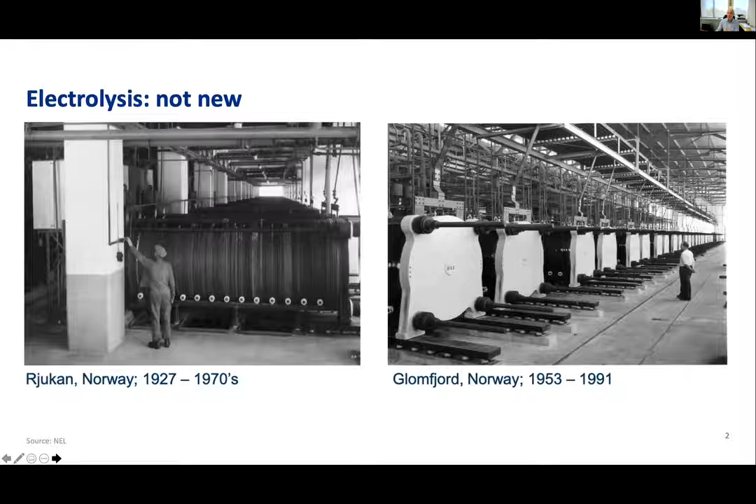And we've made tremendous progress in greening that up. So half of electricity in Germany last year was already green, and several countries in Europe are even beyond that. So overall, on average, half of European electricity is green.

But then if we look at the bulk of final energy, those are molecules—coal for power generation, natural gas for heating and industry, and of course diesel and petrol for transport. There we still have a lot of work to do, because we only have 9% renewable molecules in the system. So yes, there is a lot of progress in the electricity field, and we see the impact of solar and wind, but the bulk of it is still molecules, and they're still not clean enough. So what do we need to do?

Of course, we need to keep building new renewable electricity if we want a decarbonized energy system. But we also need to increase the share of electricity in the overall mix, because on the electricity side it's actually easy—right now solar and wind is cheaper than fossil fuel. So expanding that doesn't cost money, it actually saves money. So we also have to expand the use of electricity in the mix. Electrification is a big element of the energy transition.

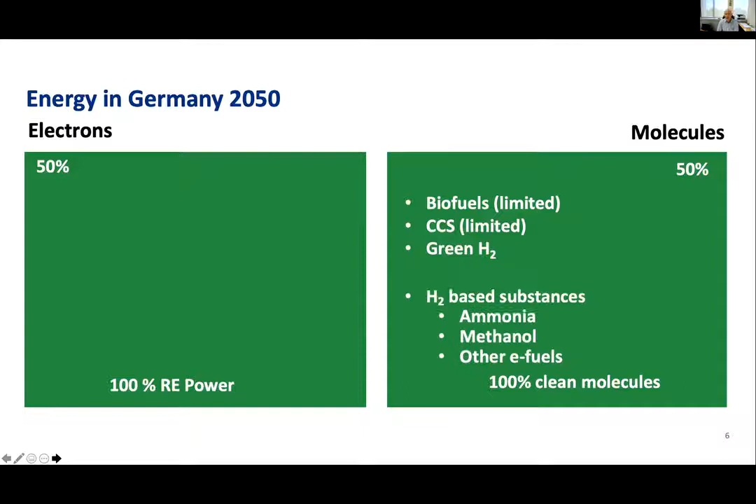With hydrogen we can also make ammonia, as already mentioned. We can make methanol, other fuels, e-fuels, jet fuels, etc. Of these options, I think hydrogen, especially green hydrogen, has the better cards because you can do it small or big, decentralized or centralized. You can ship these fuels cost effectively over big distances, and you can actually store them loss-free over seasons. So of the options on the molecule side, I think hydrogen will have the biggest share.

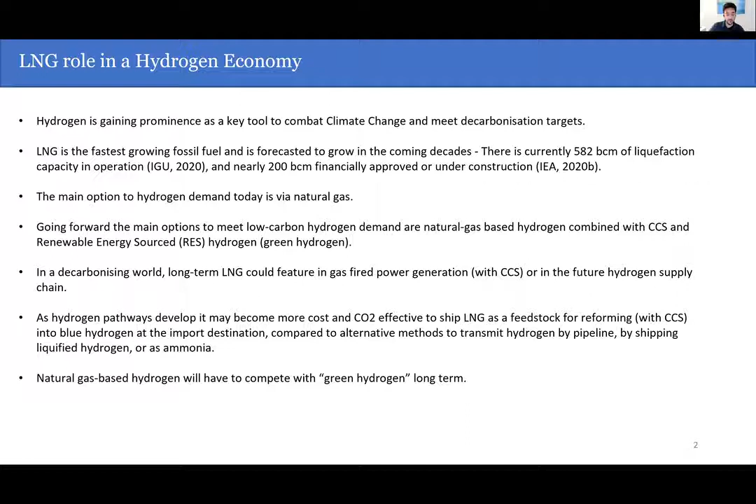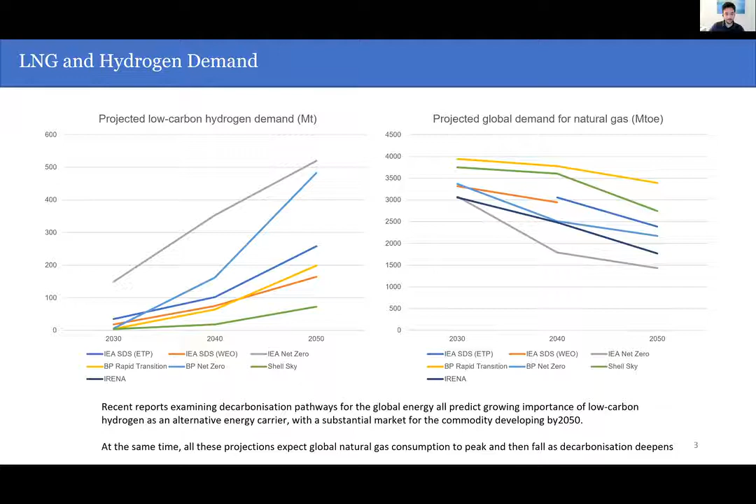So to summarize where LNG can play a role: there are roughly three different ways natural gas can contribute. One is to deliver LNG as is, and then at the receiving terminal capture carbon, apply carbon capture, and inject hydrogen into the grid. The other option is, on the upstream side, to convert the gas to hydrogen to ammonia, which allows it to be shipped more easily, then reconvert the ammonia back to hydrogen, or use ammonia directly in, for example, coal-fired power stations, as we've seen in Japan recently.

The third option is to completely convert the upstream gas into liquid hydrogen and ship that liquid hydrogen, which requires some economic and technical advancements. But roughly, there are three ways gas can play a role. There's also pyrolysis, which is another technology - instead of methane reforming, you would use pyrolysis, for example.

So why were we looking at those two, besides the overall demand and importance? Well, there are actually some links between them that should be investigated a bit more. From a feedstock natural gas perspective, as the fastest growing segment within natural gas, LNG will play a role.

If there is a place for quote unquote blue hydrogen, LNG will obviously play the key role to deliver that. There are less and less pipeline gas projects, and there's less indigenous supply, especially in Europe. Therefore, if there is a role for blue hydrogen, LNG will meet that. The LNG industry is forecasted to have a positive future in the next 10-15 years, so how does that fit in with hydrogen?

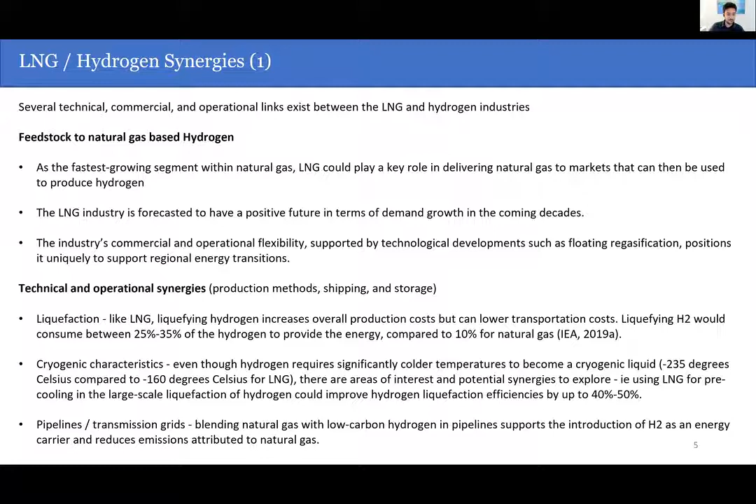But also in terms of downstream, utilizing natural gas and introducing low carbon hydrogen to those grids is a possibility, and in some places it's already being done. It could be up to 10-20% of the current gas grid that can take in low carbon hydrogen, which allows for synergies there. In terms of commercial synergies, probably even more.

In terms of the shipping side, although there were some initial views on reconverting LNG ships to hydrogen ships, it seems to be unlikely. However, of course, using LNG as a feedstock will help the LNG shipping industry a bit more.

But from a value chain component, the way LNG was developed 30, 40 years ago and is still being developed, there are lots of similarities for hydrogen potentially. You need long-term buyers. The same importers previously could probably be the same importers for hydrogen. You need a very complex chain with project financing from the upstream all the way to the downstream, assuming there is a level of exports and imports being developed.

You will need some potential government-to-government agreements, which we've already seen, some bilateral agreements, some infrastructure development and transport. All that has been something where the hydrogen industry can learn from the LNG industry. And of course, long-term contracts, these large projects will need to be underpinned initially as technology improves and as a shorter-term market develops.

So there are a lot of potential vertically integrated approaches that can be applied from one industry to another. And really a lot of the same players, whether it's energy companies or technology providers, are companies looking to transfer some of that large project management experience or large capital intensive technologies from one to the other.

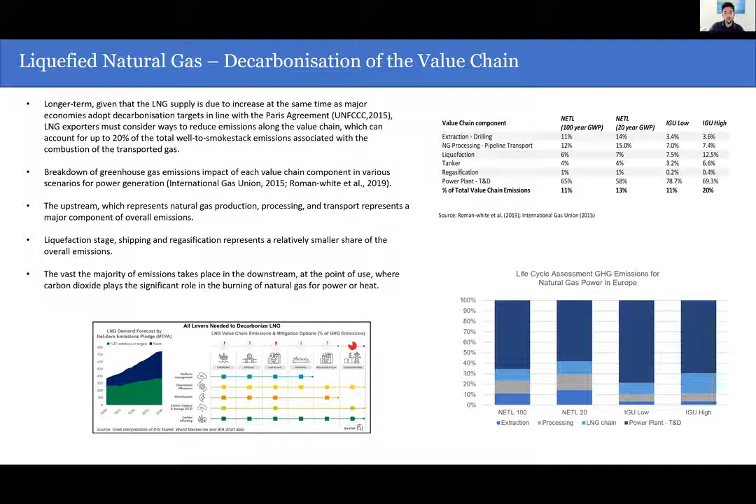But at the end of the day, over 70 to 75%, depending on the carbon intensity of the source, of the emissions is downstream, meaning, for example, the power plant. To address that, long-term importers and exporters will have to look at different measures, and hydrogen provides that opportunity. Blue hydrogen specifically, or natural gas-based hydrogen, provides the opportunity to decarbonize the entire chain if the conditions make sense. If you look at all the decarbonization options LNG producers have, these are all things being looked at, already announced, or being implemented.

It obviously depends on project to project in terms of the geographical components or the resources available. But these are all things that are being done.

However, if you look at more strategic or hydrogen related options, these are the ones where LNG exporters long term and LNG importers will start to think about decarbonizing and lowering emissions as much as possible. If we want to truly decarbonize, we may want to look at options on the importing end, such as applying methane reforming or pyrolysis, then blending the hydrogen into the grid or straight to industrial users and clusters, which we've seen as a potential first wave of opportunities. That could be a great opportunity for the LNG industry to deliver high value, low carbon hydrogen first, and then be part of that transition.

More strategically, long term, if you're a resource holder with access to large scale renewables, you could think about producing hydrogen upstream. We mentioned blue here, but there's no reason it can't also be green, or both, depending on the characteristics. This is where hydrogen really factors in. As a previous speaker mentioned, blue hydrogen might be cheaper now, but eventually it will be green only. What does that mean? Is there a role there? And what do you do in the meantime?

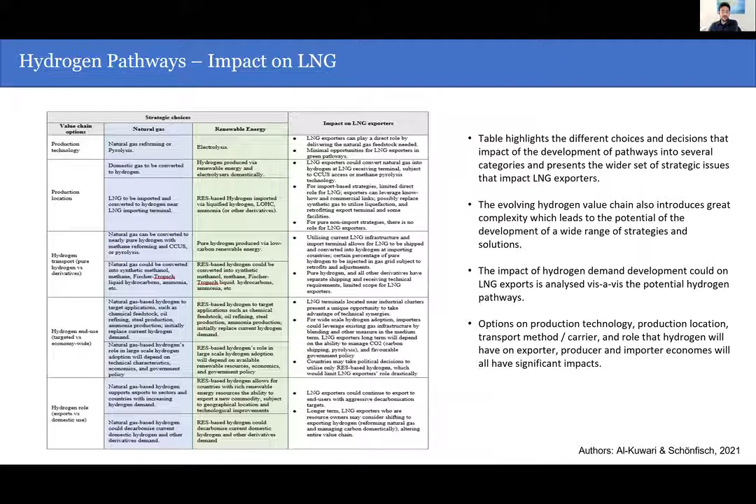Something interesting to note is that gray hydrogen, the non-blue, high CO2 emitting hydrogen, is now almost very close to blue hydrogen in cost. If you look at today's CO2 prices in Europe, that gap is closing very quickly. But that gap can also close with green hydrogen even quicker as we go forward. If that were to develop and it became green only, your options as an energy exporter are really minimal. You may be able to retrofit some facilities, but your upstream gas will have less value. So the implications are significant for different pathways. This is illustrative, but significant.

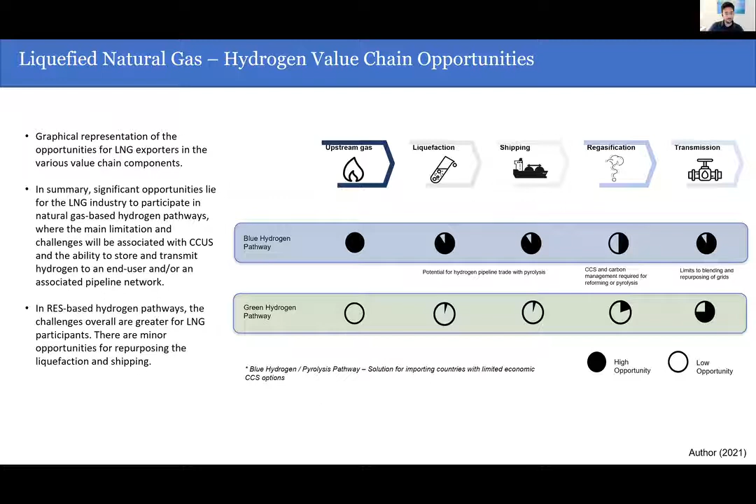Technology will be a big thing, economies of scale on the production side, but also policy choices, CO2 prices, and potentially more dogmatic choices, where some regions will say, no, we want green only, no matter what. All those things will impact the short to medium term. Natural gas-based technology, though, taking everything into account and looking at the big picture, is the most economical choice for the short to medium term, with most studies saying until 2030 or 2035, depending on the region. Long term, it could become competitive if renewable energy-based electrolyzer costs come down.

But also you have to factor in the cost of natural gas, which depends on the region. Amongst all the technologies, natural gas-based CCUS can be supplanted by methane pyrolysis, which is interesting because this technology is being looked at more and more. It eliminates the need to manage CO2, giving you solid carbon instead, which is an easier product to manage and store. This could be a game changer for blue hydrogen or natural gas-based hydrogen, but there's a lot of uncertainty there.

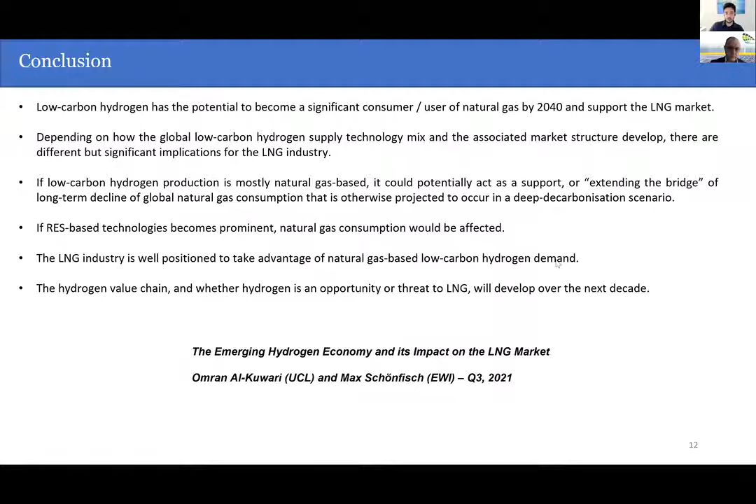Thank you very much, Mr. Omran, for this insightful and concise presentation. Please stay with us for the discussion after Jorge's presentation. I think from the beginning we heard a very inspirational word from His Excellency, the Ambassador, Dr. Christian Tudor, and Dr. Abdul Sattar, Frank Wouters. I think hydrogen is coming as a carrier for the future, but there is still some competition with other resources, as Mr. Omran mentioned. But from the European side, we have to hear from Mr. Jorge also what happened in Europe, and what is the roadmap for Europe to achieve those ambitious targets.

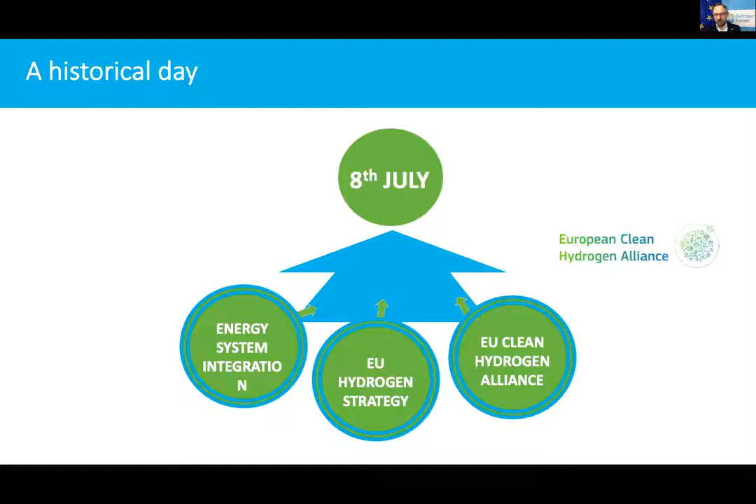But the most important target when it comes to capacity is the 6 gigawatt electrolyzer capacity producing clean hydrogen as of '24, and 2 times 40 gigawatt as of 2030—40 gigawatt in Europe itself, and another 40 in the neighborhood of Europe, where the Gulf and the MENA region, of course, would be part of it.

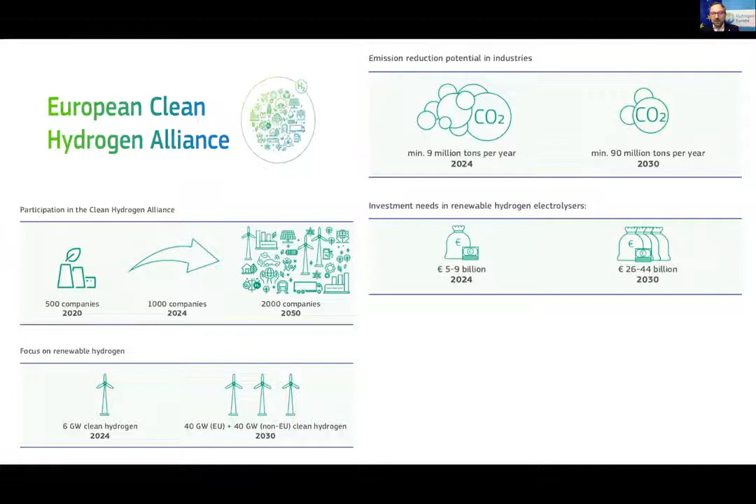On the right-hand side, you see how this translates into CO2 reduction targets: 9 million tons already in '24, and 90 million tons, a tenfold reduction of CO2, in 2030. The investment needs in renewable energy, especially electrolyzers—and here we concentrate on electrolyzers only—would be between 5 to 9 billion in '24, and up to 44 billion in 2030.

This I showed you already, but what is clean hydrogen? This is one of the most important questions. We need to see what the European Commission has defined as clean. They have defined it in a delegated act, which still needs approval by the member states, defining clean hydrogen production as corresponding to not more than 3 tons of CO2—2.2 to 3 tons of CO2 per ton of hydrogen.

There is also a mention of ammonia. For ammonia manufacturing, it now requires compliance with hydrogen as input for it to be in the taxonomy range. This was an interesting success also for Hydrogen Europe, because ammonia plays an important role in transporting hydrogen, or in being used as a fuel in maritime shipping.

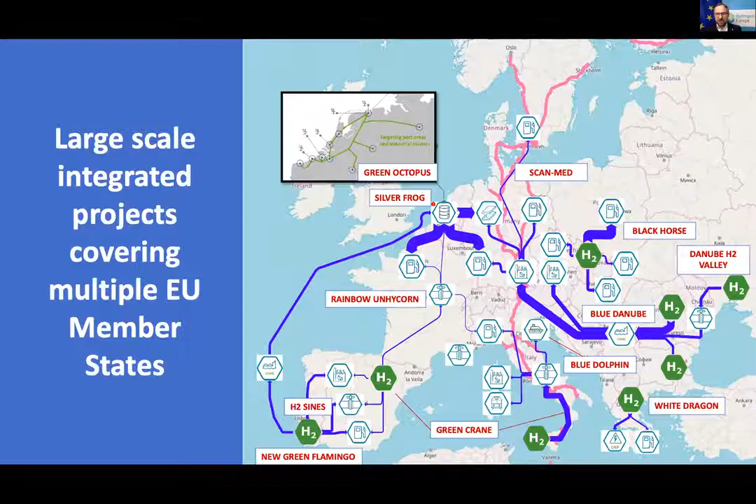These governments are now endowed with a lot of money from the recovery and resilience funds, the after-COVID-19 funds, globally well known, and governments will invest into hydrogen manufacturing, to say the least. These large-scale flagship projects cover the whole hydrogen value chain, achieving an interesting amount of hydrogen volume and decarbonization, across all parts of the value chain.

How do we wish to not make these projects just state-aid-funded, but future market compatible? I'd like to introduce a mechanism we want to promote. On one hand, it's a funding program to efficiently promote the market ramp-up of green hydrogen and hydrogen-based derivatives. It's also based on hydrogen energy partnerships with countries that have a correspondingly large potential for long-term, cost-effective and reliable supply of green hydrogen to the EU. Qatar and Kuwait definitely fall into that category. There should be long-term purchase contracts on the supply side, and contracts for difference on the demand side.

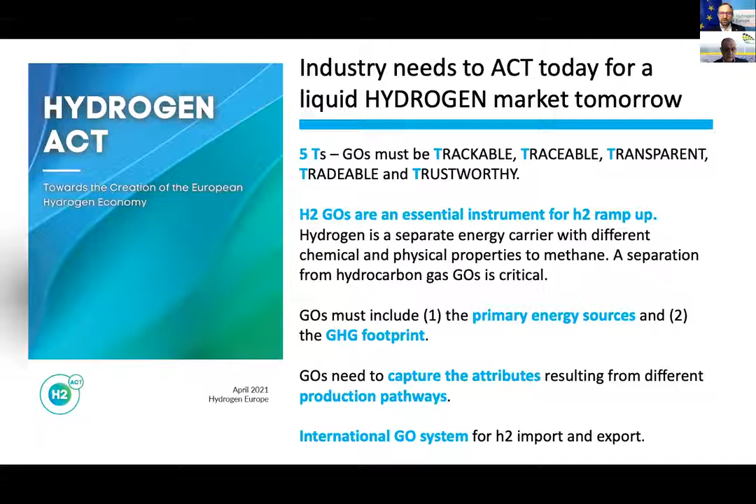The GOs need to capture the attributes resulting from different production pathways. We believe that very soon an international GO system for hydrogen import to Europe, but also for export, will be established. We believe it should follow the 5 T's: it must be trackable, traceable, transparent, tradable, and trustworthy.

With that, I would like to thank you for the invitation. Thanks for your attention, and also excuse myself for not being able to attend the Q&A. But again, Frank Wouters, I think, will make it. Shukran, thanks very much indeed.

Thank you very much, Jorge, for this very clear, concise, and straightforward presentation. I think we heard a lot of good things, and that is one of the elements or pillars of any hydrogen strategy: to have this roadmap for a country or for a region like Europe, and this is very important for an emerging carrier as hydrogen. Thank you very much, Jorge, and hope we can count on you in our future events. Thank you very much.

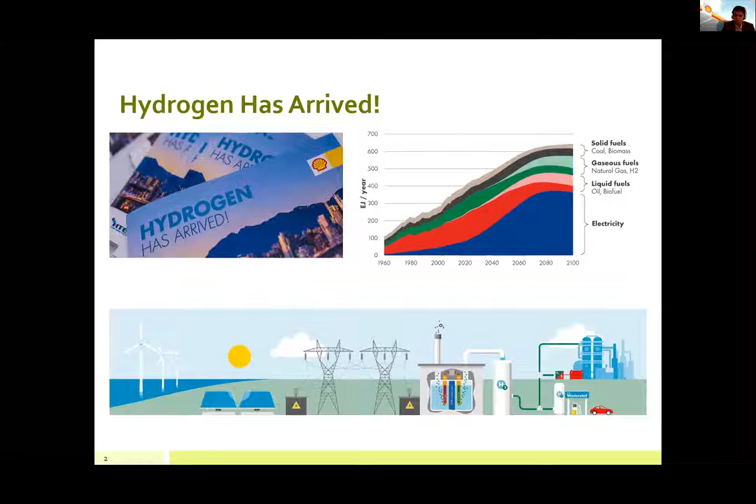What's important to realize as well is, as Frank pointed out, this is going to be a huge effort. The scale of the problem is very large, all the way from hydrogen production, transport, utilization - everything needs to be encompassed into this new infrastructure that is coming up. And innovation will play a very key role. So what we see at Shell is that there are the consumers, the energy providers, the suppliers, and the governments - everybody has to come together to essentially form this new hydrogen economy.

And we've seen Dr. Omran mentioning this as well. I would just like to give an example of Pearl GTL, the largest gas to liquids plant here in Qatar that Shell is operating. The Pearl GTL plant is founded on a very solid foundation of 40 years of research.

But roll back time 40 years, people were still sending emails to each other, requesting for meetings to be set up and discussions to be had. And with all due respect to the pioneers of that research, the latter stages of the research moved a lot faster, enabled by technologies like digitalization technologies that enable such kind of innovation to happen.

Again, realizing that geographically we are not limited to where innovation can happen. We talked about Europe as being the champion in terms of hydrogen production, but hydrogen research and hydrogen innovation will happen all over the world.

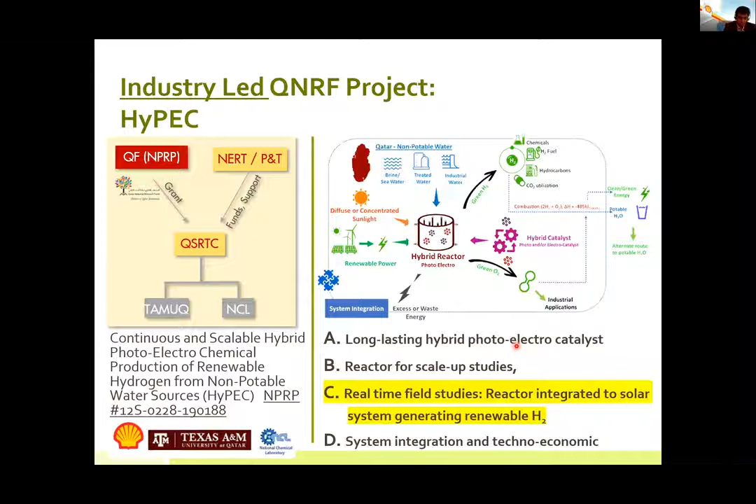For this, we pulled a team together, again distributed in different parts of the world, within Shell and outside in academia as well, where Dr. Dabi Al-Mohanadi is leading the concept development and systems integration. Dr. Santosh Kumar Babu is leading from National Chemical Laboratories an effort in catalyst development. Dr. Konstantinos, whom you would be hearing present in this hour as well, is leading the reactor development, and I will be championing the overall project and also leading the pilot development in Qatar.

We have just completed our first year of project, and what we have sustained thus far is we've mapped out the water resources that can be utilized for this hydrogen HyPEC project, and we have gotten the experimental setup ready, where we have seen the first indication of hydrogen. Also, some background work has been completed to come up with suitable photoelectrochemical hybrid reactor concepts that we will be looking into for the pilot.

2020 has, of course, been quite challenging for research as well. Specifically, our efforts of catalyst development in India have been quite severely challenged by the pandemic. However, we have had good leads that we can generate a catalyst, an organic catalyst that we can utilize in this project.

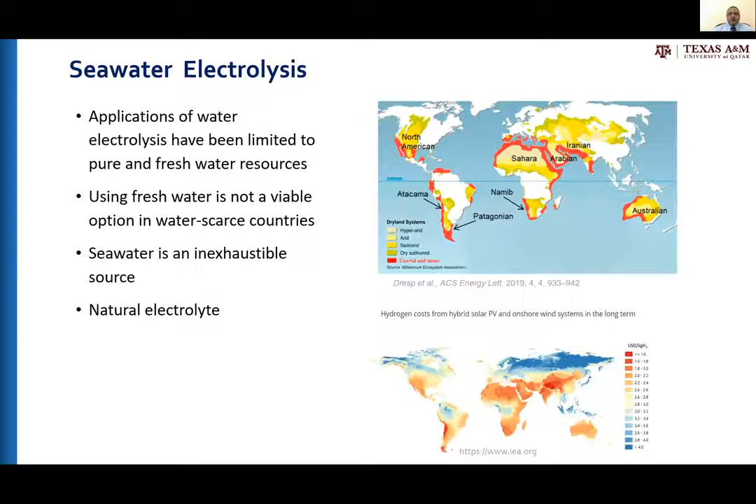However, there are some challenges with using seawater for water electrolysis. The first and most important one is the chlorine evolution reaction. We know that seawater has chloride in it, and when chloride is oxidized to produce chlorine, this competes with water oxidation to produce oxygen, because chloride oxidation involves only 2 electron transfer steps, but oxygen production involves 4 electron proton transfer steps. This makes chlorine kinetically more favorable than oxygen, but thermodynamically less favorable than oxygen.

So how do we address this problem? Basically, either operate below the thermodynamic limit for chlorine production, which is around 1.72 volts—this would require very highly efficient electrocatalysis—or produce catalysts that are more selective to oxygen rather than chlorine. Another alternative, also part of our project, is to do coating for the catalyst to prevent chloride from reaching the catalyst and make it selective to water.

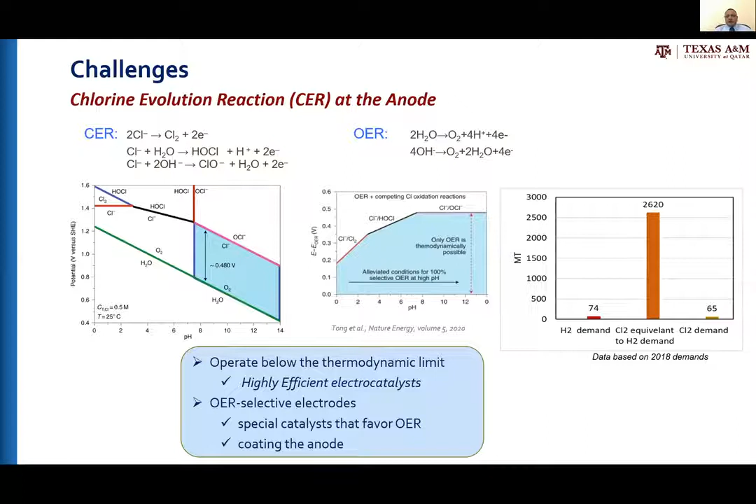Another challenge with using seawater is the formation of precipitates from calcium and magnesium. We know that seawater also has calcium and magnesium, especially problematic in alkaline conditions. This is actually how the conventional electrolysis process is usually done, in alkaline condition—that's the most common and cost-effective technology done now.

And the problem with that, when you use seawater, you precipitate magnesium hydroxide and calcium hydroxide. The possible solution for that is either remove them from the water before use, but this requires the addition of chemical reagents, solid waste production, and also pH adjustment sometimes.

The other alternative, which is desirable regardless if you work with seawater or fresh water, because fresh water also has some challenges related to working in alkaline and acidic conditions that we will talk about briefly later on.

So another desirable option is to work at neutral or near neutral pH. Why is that? Because then we will avoid salt precipitation. It will enable the use of low-cost, earth-abundant electrocatalysts that are usually unstable in acidic or alkaline environments. It will also enable the use of inexpensive equipment that would normally corrode and deteriorate in basic or acidic environments. Additionally, it will avoid the use of high concentration acid or base electrolytes.

You need a small amount of buffer since the water is already a natural electrolyte, and also it will minimize the environmental and safety issues associated with severe alkaline and severe acidic conditions.

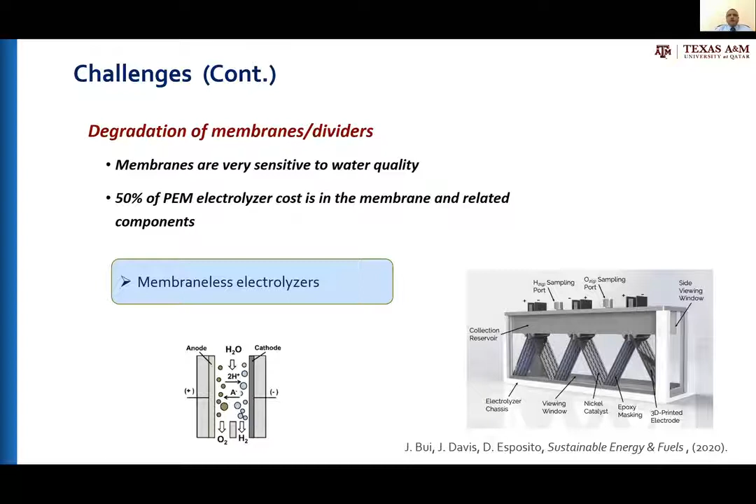One solution for that, which is also part of our project, is to use membraneless electrolyzers, electrolyzers that do not have membranes. This is one design we are planning to use, which we call the flow-through mesh electrode system. When you have a mesh here, this is not a membrane, it's just a mesh, and you have the catalyst at the outer surface of the mesh. The water flows in this direction, and as it goes out, it gets reduced on one side and oxidized on the other, to generate oxygen and hydrogen.

This shows a demonstration of the project team's work. Dr. Daniel's work is specific to membraneless electrolyzers. As you can see here, there is no mixing, and this is a major issue you would worry about with a membraneless electrolyzer—the mixing between oxygen and hydrogen. You can see the mixing is minimized, and the hydrogen comes out separated from the oxygen here.

First, to design and fabricate pH neutral electrocatalysts, and then to coat these catalysts in order to suppress the chlorine evolution reaction. Then we take the optimized ones and evaluate their performance in a three-electrode cell, and the most promising one we convert into a membraneless electrolyzer. At the end, we conduct techno-economic and life cycle analysis of the proposed technology.

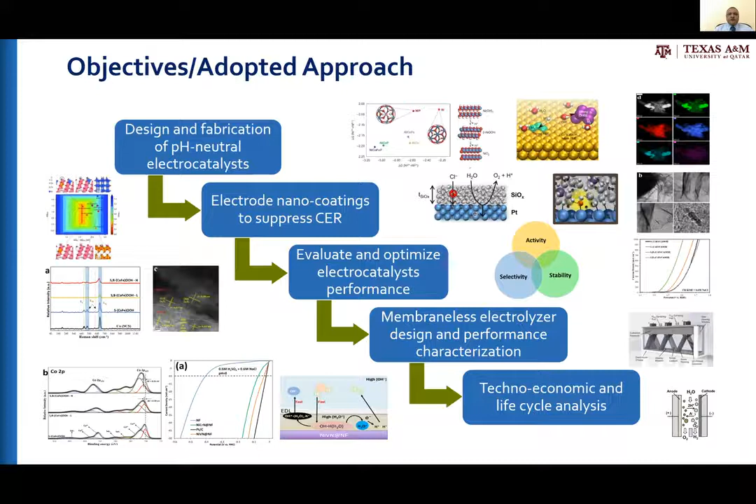So talking about the catalyst and working at near neutral or neutral pH, this is also challenging from the electrocatalyst point of view. If you talk about the oxygen evolution reaction, you would need alkaline conditions because you have hydroxide as the main reactant. When you talk about the hydrogen evolution reaction, you would need hydrogen ion as a reactant because that makes the process kinetically much easier.

However, in neutral conditions, you have water as the reactant, and this incorporates additional water dissociation steps, as we can see here. So we have to dissociate the water first, before we can do anything else. This makes the process sluggish and kinetically limited, and it's actually more limited for the oxygen evolution reaction, for the reasons I talked about regarding electron transfer, in addition to the water dissociation step.

People have been working on this—there have been numerous electrocatalysts developed in the past and still being developed, but the majority focused on either acidic or alkaline conditions, and the most efficient ones are still based on noble metals or noble metal oxides. There has been some effort to produce inexpensive, earth-abundant metal and metal oxide based electrocatalysts, but not much has been done on neutral pH water electrolysis.

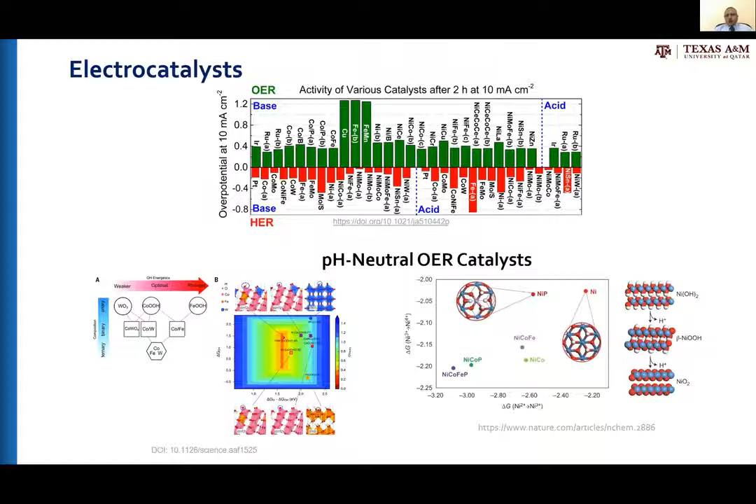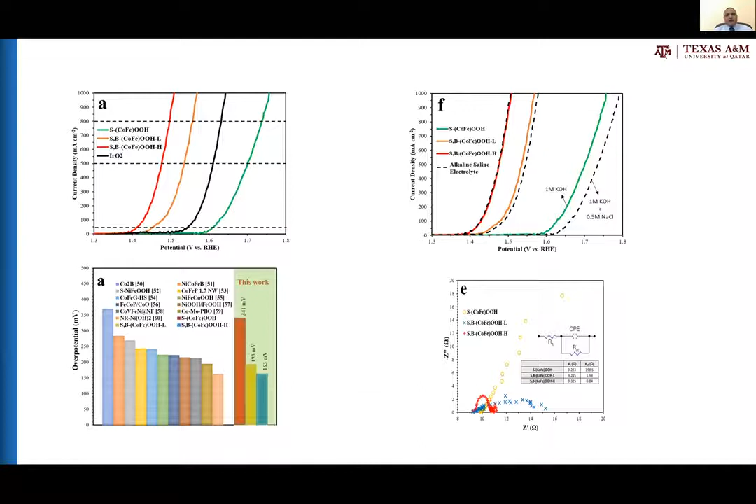We did the work at neutral pH as well, and performed stability tests. The catalyst was very stable, and we found that the sulfur-boron doped one is highly efficient compared to the sulfur-only doped one in neutral conditions.

Also for the HER, or hydrogen evolution reaction catalyst, we used the hypothesis that combining a strong hydrogen-binding metal with a strong hydroxide-binding metal oxide would enable the water dissociation process, in order to facilitate the hydrogen evolution reaction.

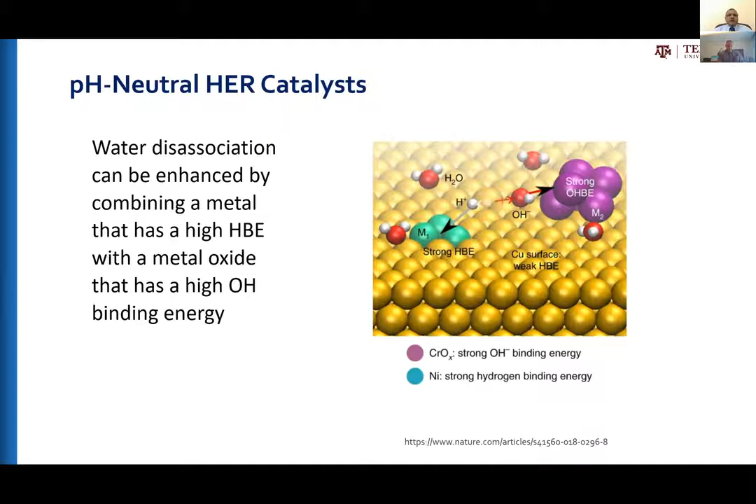Finally, this is about the coating of the catalyst. This shows the results of a silicon oxide coating on the surface of the catalyst, an ultra-thin layer designed to prevent chloride from reaching the catalyst while only allowing water to reach it.

You can see the results here comparing the one that has the coating and the one that does not. We can see very good performance when we have the coating with the silicon oxide.

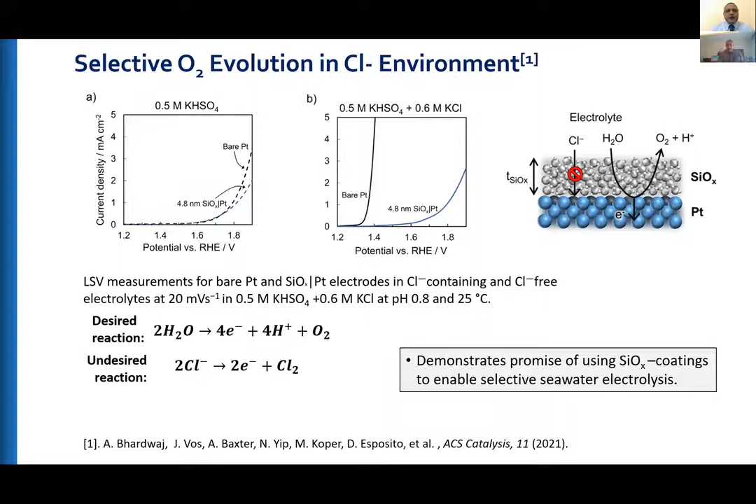In summary, operation at neutral conditions is desired regardless of the source water. Also, membraneless electrolyzers could decrease materials and manufacturing costs, and are more durable in harsh operating environments. The sulfur-boron doped multi-metal oxyhydroxides and also the oxynitrides provided good efficiency and stability for oxygen evolution and hydrogen evolution reactions respectively. Encapsulation with an ultra-thin permeable overlayer prevented chloride from reaching the catalyst, making it selective to oxygen evolution.

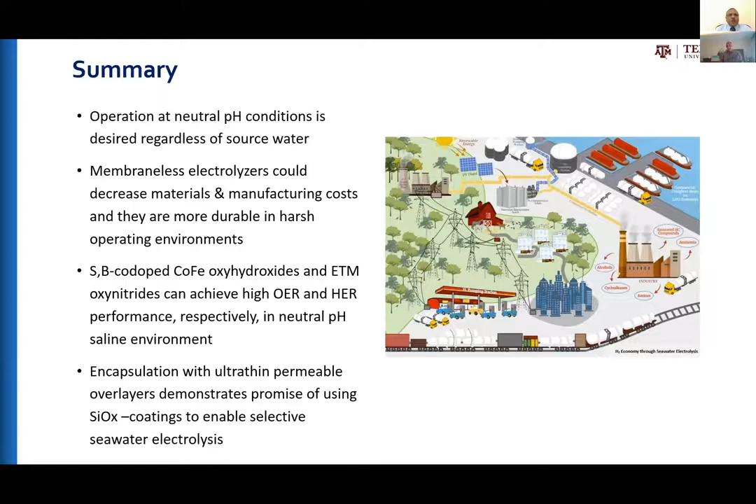In terms of output and impact, thanks to the generous support from Qatar National Research Fund, during the first year we have published 5 papers. We have 4 articles under review by journals, we are working on 3 additional articles, and 1 disclosure application that we plan to file soon.

We have 3 graduate students and 7 undergraduate students involved in the project, and 7 postdoctoral research associates across 3 different academic institutes. Also, the most important thing is the synergy and collaboration between academia and industry, as Dr. Dhruv mentioned a few minutes ago.

And finally, I would like to acknowledge the team members from Texas A&M University at Qatar, from University of Toronto, from Columbia University, from Shell, and also acknowledge the generous support from Qatar National Research Fund and also the co-funding from Shell.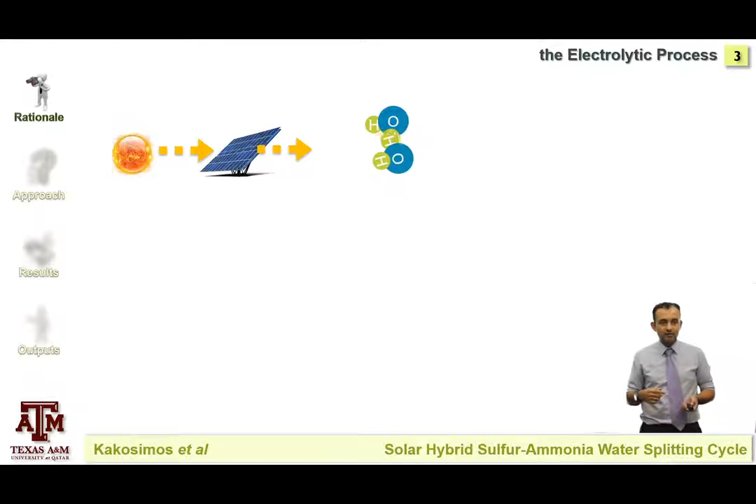As you heard already from Dr. Abdulwahab, the electrolytic process is a straightforward process when we want to use renewable energy resources to produce hydrogen. We utilize sunlight, we convert it to electrons, and then we split water. Now, for the photocatalytic process, we need to do one extra step. We require a catalyst that in this case utilizes the sunlight, photons to make the electrons, and then split water.

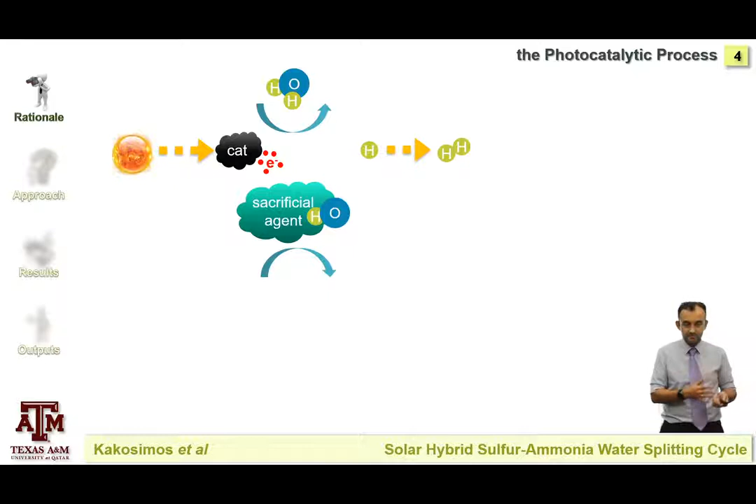Of course, the process is more complicated than this animation, but in any case, to drive it forward and release hydrogen, we require a sacrificial agent. If we replenish water from one side and the sacrificial agent from the other side, we can have a continuous stream of hydrogen produced. Now, to make it sustainable, it has to be a cycle, which requires regenerating the sacrificial agent by using extra sunlight in this specific project. And then we have what we call a water splitting cycle. The keyword 'hybrid' comes from the fact that we want to use both the photon energy for hydrogen and the thermal energy coming from the sunlight.

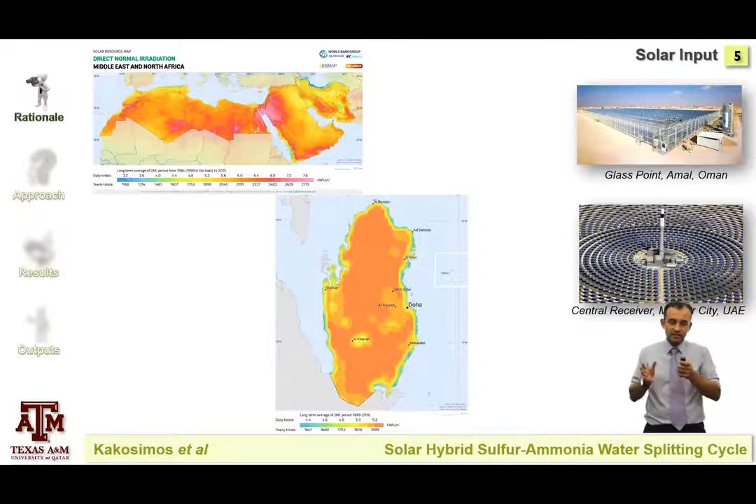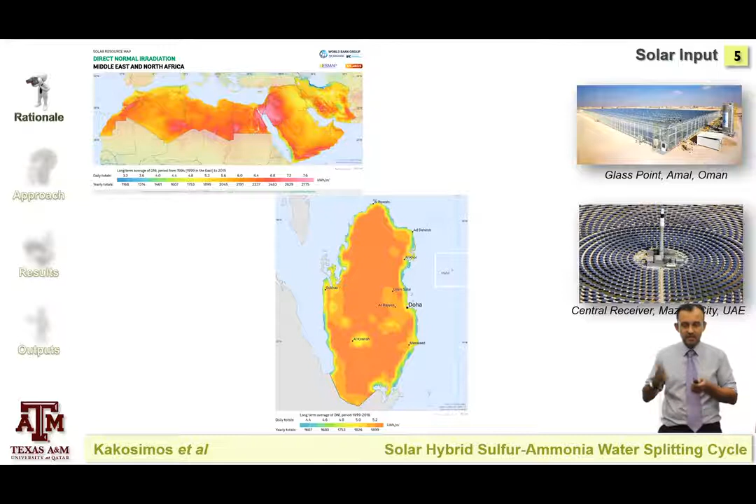So why did we do this project in Qatar, and what was the central part of this? As you heard already, there is plenty of sunlight, but the idea is that when we consider concentrated solar, most times we limit it to concentrated solar power, which is a conversion of sunlight to thermal energy. However, when we want to utilize the whole spectrum of the sun, this process can become more beneficial for most cases around the world that have plenty of sunlight, regardless of the aerosol problems that we see in regions like North Africa and the Middle East.

And now this becomes a complete water splitting cycle. The process is slightly complicated because it's now not only one step that we have in the electrolysis, but multiple steps. But the idea becomes thermodynamically favorable if you go to these higher temperatures.

Now, the hybrid part was also one of the innovative components of the project. For the photochemical part, we made some early estimations that we require around 18% of the energy to drive the hydrogen evolution. To do this, we designed a catalyst that operates around 520 nanometers. The rest of the solar spectrum was used to drive the thermochemical processes.

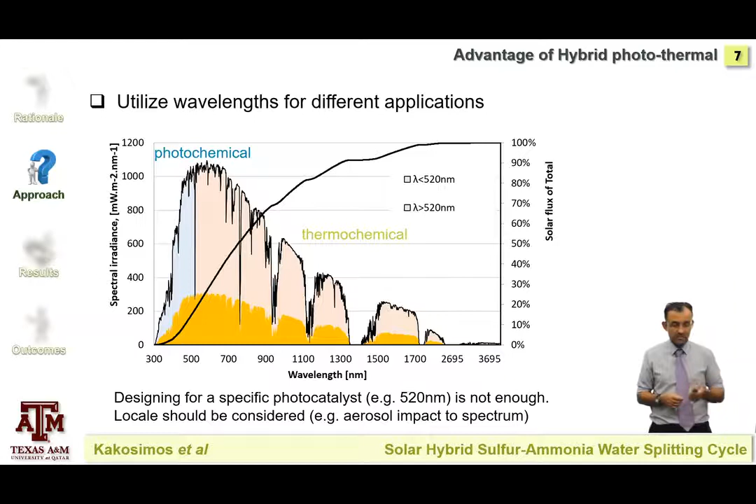So for the hydrogen evolution, what we call the photocatalytic water splitting, we designed a catalyst based on cadmium sulfide and zinc sulfide. This is called the binary band gap catalyst because it utilizes two semiconductors. And then we also use platinum as a co-catalyst to accelerate the process and achieve higher rates.

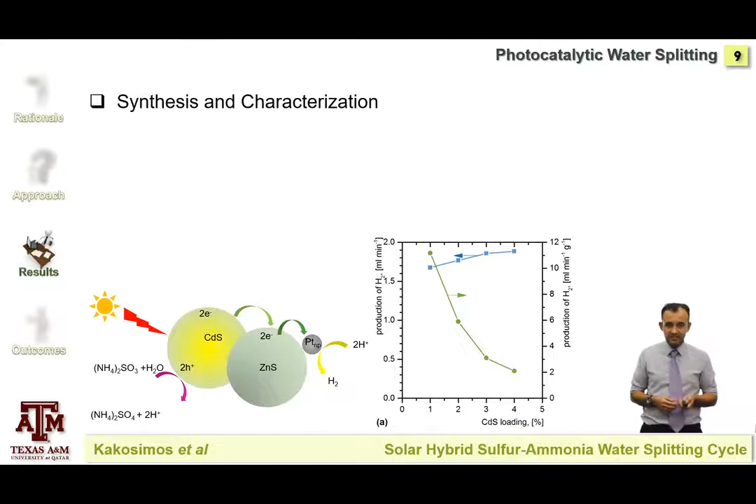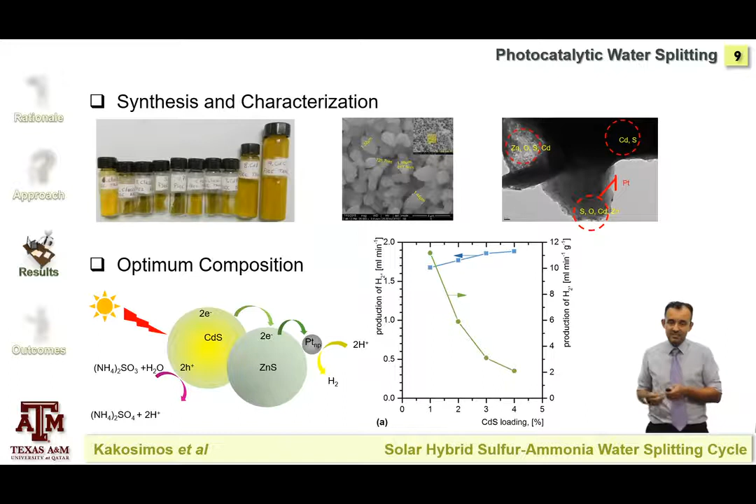During the duration of the project, apart from synthesizing and characterizing the catalyst, we actually conducted plenty of experiments to develop the kinetics and also understand what are the optimum conditions of this catalyst and reactor, such as the catalyst loading and how much light it can utilize. One key finding that became the seed for further projects is the idea that the catalyst can utilize more sunlight, more energy, than the typical testing conditions in a laboratory setup.

For the thermochemical part, or the oxygen evolution part, we utilized thermodynamic calculations and developed mechanistic models by conducting both numerical calculations and lab scale experiments in high temperature furnaces. The concept here was to find the sweet spot, the appropriate temperatures to conduct the high temperature thermochemical steps.

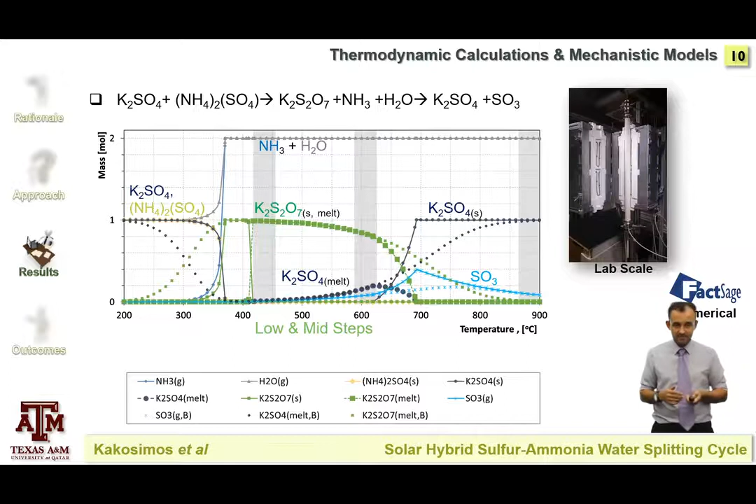Now, when you put everything together, we can design the process. We have the hydrogen subcycle, the photochemical step, that has a 25% photon to hydrogen efficiency. And then we have the oxygen subcycle that requires large amounts of the molten salts I mentioned. However, this can also be used for the storage of energy.

We put all things together in this simulation and can now tweak it and figure out where are the differences in the design and what are the weaknesses. So as it came up, the large quantities that we use for the molten salts, which in the beginning we thought was one of the key innovations of the project, ended up being the weakest part of the project.

So in the next phase, what we did, we decided: why do we need to have all of this in the liquid phase? Why not do this in the aerosol phase, where we practically have small particles starting as solids and then becoming liquid particles to drive and realize all the solar thermochemical steps.

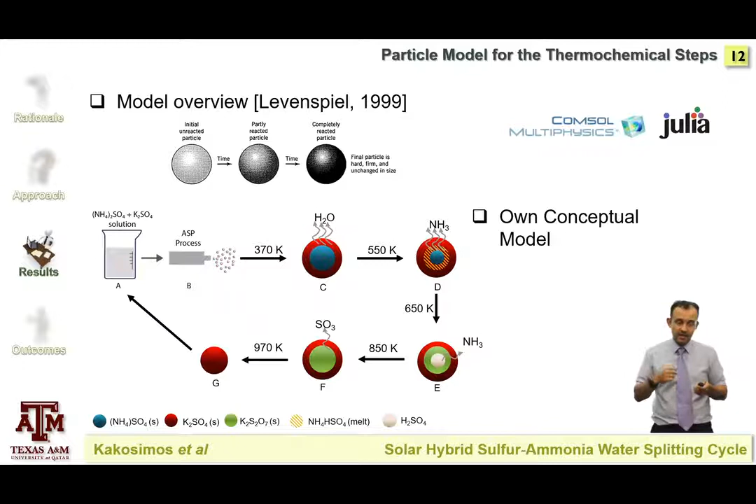We developed a conceptual model, as you can see in this animation, where we have the particles starting from the chemical step, and as we increase the temperature, we end up realizing all the different reactions. This ended up being a seed for a bigger idea, a bigger concept that we call aerosol synthesis.

In between that, however, as you may know, solar thermochemical reactions have very high temperatures and very big requirements on the stability of the materials. To characterize this, we developed a new setup in our laboratory that again became a seed for a different work on testing the aging of these materials. We call this accelerated aging and optical characterization, because we can figure out for any material coming out from very small quantities in the lab, how this will behave when it's going to go to a real case.

Actually, for this specific work, we were one of the first ones reporting that a new family of ceramics, the ones we call MAX phase ceramics, can be utilized in solar thermochemical applications.

Now, as I said before, the seed of this project led to more projects and more people being trained on that. So we started with a very standard photocatalytic setup that now evolved to become the seed for many different photocatalytic setups, and one of them was mentioned earlier by Dr. Arora. The photocatalysis outcomes became the seed for 2 NPRP projects, 2 QNRF projects, and 1 internal project.

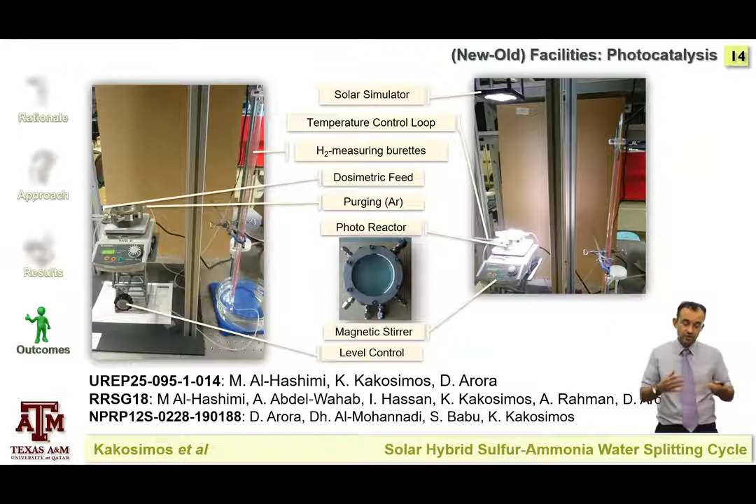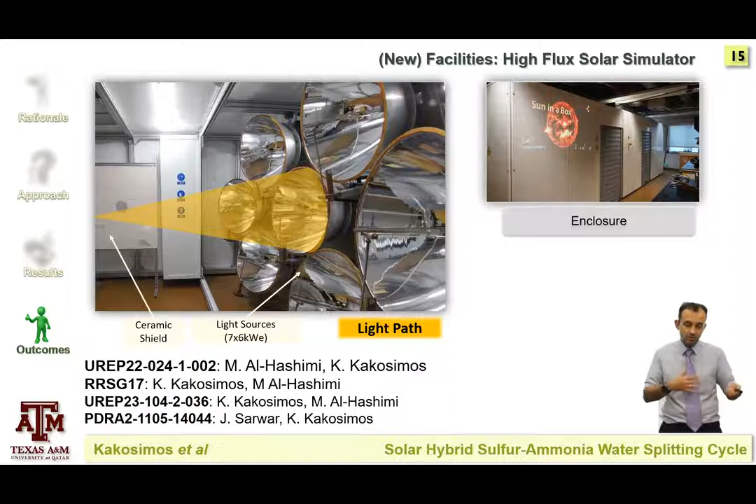The experience we gained from the high flux solar simulations and of course the experiments ended up internally giving us this very impressive facility. This is a high flux simulator, which is probably still the only one in the Middle East and North Africa region, and we can now realize close to pilot scale thermochemical experiments. Again, the seed for more work and more projects to come.

The accelerated aging I mentioned before became a nice disclosure, and now we are trying to find industrial partners to utilize this technology. We found applications beyond photocatalysis, in paints, and practically any material exposed to sunlight, because these materials degrade over time. Our method ended up being 2,000 times faster than the current accelerated aging methods.

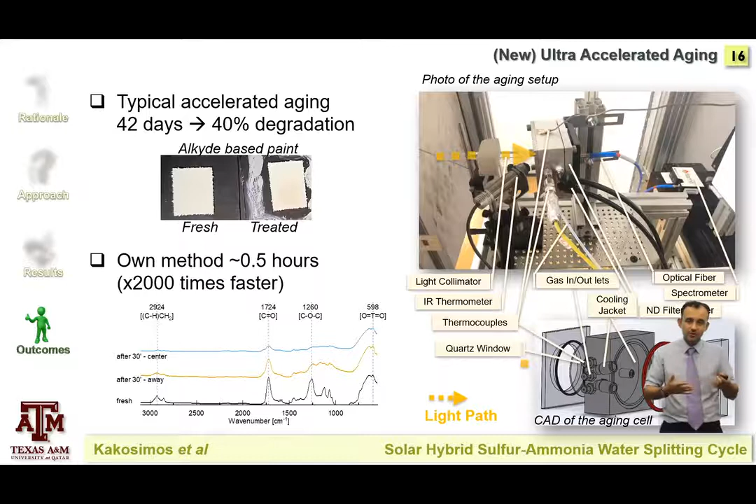Of course, we can only realize it now in the lab, but we're looking for opportunities to make it a standalone project. And again, at the end, everything we learned from the previous projects became the whole idea of the solar aerosol synthesis.

Concentrated light can also be used beyond driving simple standard reactions that we know so far. It can drive many different, more complicated steps that may be required for hydrogen production if we go to more advanced cycles.

Again, for the sake of time, I would like to close it here and thank the two mentors of the project, Dr. Srinivasa and Dr. Muratov, who helped me initiate my research in hydrogen production, on solar thermochemical and photochemical steps. The students we trained through the project, during the duration, we had almost 7 undergraduate students involved and 3 master students completing their studies through the project, 1 PhD student and 1 postdoctoral fellow who is actually now a faculty member. We published a decent amount of papers, but again, this project was for us the seed for many more ideas, for funding and also research.

With that, I would like to close and thank everybody that supported this project, and of course Qatar Foundation for the generous support.

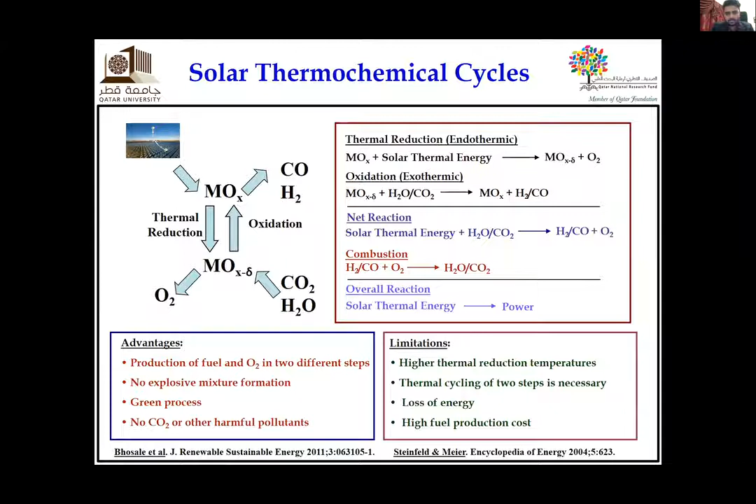In terms of materials, there are two types usually used in thermochemical cycles: volatile metal oxides, including zinc oxide cycle and tin oxide cycle, and non-volatile, which includes ferrites, doped ceria, and perovskites. Nowadays researchers in this field focus on non-volatile metal oxides because they are easy to handle and don't go into the gas phase, so quenching and other extra steps are not needed.

That's why we decided to focus on these three: ferrites, doped ceria, and perovskites. In the first part of the presentation, I will show you some results in terms of ferrites, ceria and perovskites, including the synthesis, the characterization, and also the fuel production capacity. Then at the end, I will show you the solar experiments in which we use methane also.

In the case of ferrites, we use the sol gel method, along with co-precipitation and combustion synthesis methods. I'm focusing on sol gel more for ferrites, so I'm showing that aspect here. We use nitrate precursors and propylene oxide as the gelation agent. After gel formation, drying is done, and then the materials are calcined.

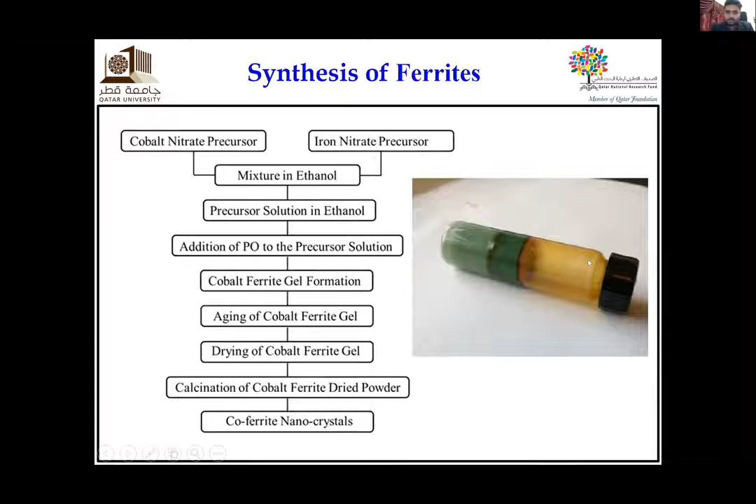At the end, you can see this gel. It looks very strong, so it's not flowing. We were able to find a good quality of gel in that case.

After that, the first thing we did was find out the phase composition, because it's important to generate the required phase. For example, we made nickel ferrite with about six materials, and cobalt ferrite also with six materials, changing the composition by varying the concentrations of nickel and iron.

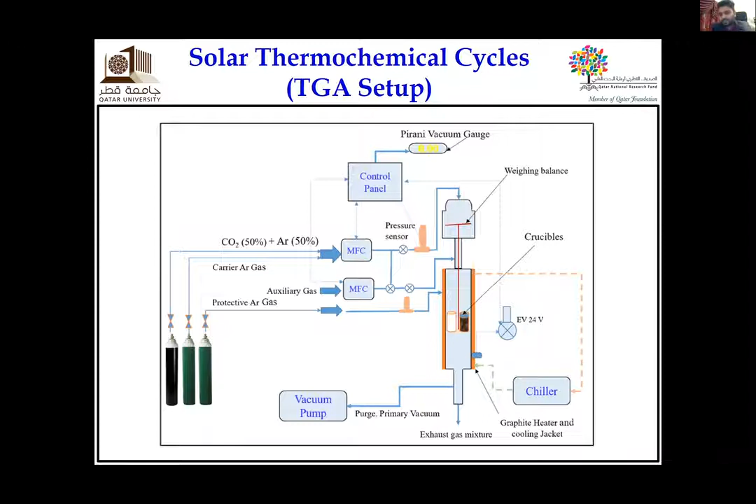We used this TGA to develop our reactor setup, where the TGA is the main component. We have mass flow controllers, gases coming in, and a chiller required for TGA operation. The gases were then sent to gas analyzers. We did two-way calculations: one by weight balance, and the second by gas analysis, to determine how much oxygen is released and how much hydrogen or CO is produced.

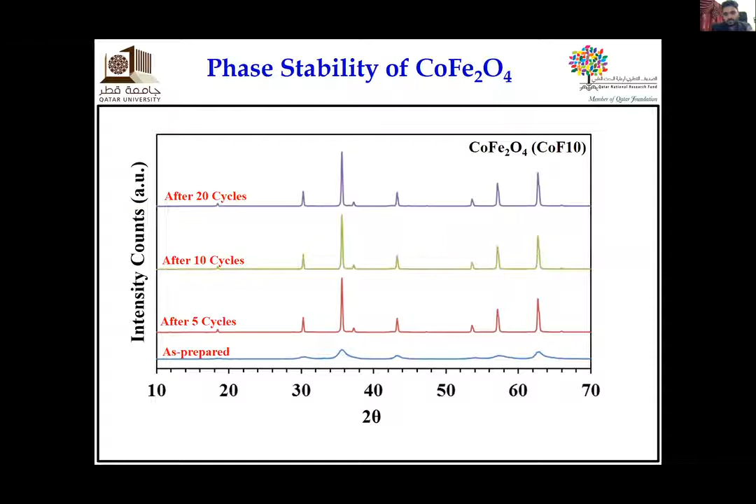As mentioned, in addition to nickel and cobalt, we did magnesium ferrite and nickel-magnesium ferrite as well; this data is already published in the literature. After the ferrites, we focused on ceria. In ceria research, people typically use pure ceria, CeO2, as the base material, and then dope it to improve the oxygen yield or hydrogen yield.

This actually we did here. Sorry, I'm not able to see this.

But here we did the transition metal doped ceria. So we dope nickel, zinc, manganese, iron, copper, chromium, cobalt, and zirconium. So multiple metals were doped.

After calculation, we understood that in case of oxygen release, the doping of zinc, iron, and chromium actually improve the oxygen release, not that significantly, but yes, better than the ceria.

And in case of the fuel production, the zinc and iron is better. Now in the literature, zirconium is better, but that is about 25% doping. We did only 10% doping. So basically, if you go for 25, the numbers will change.

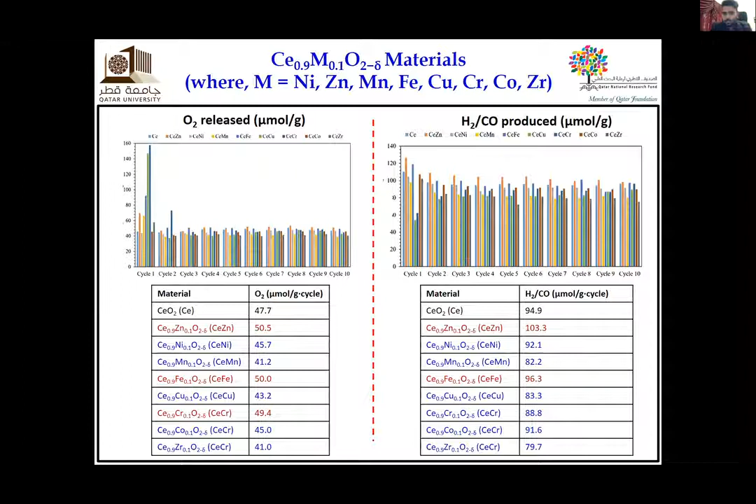Then after doing this, we did another study in ceria where we doped lanthanide series dopants. Same approach was applied with the co-precipitation of hydroxide method. These are the XRDs, showing that we successfully synthesized. I skipped the SEM and TEM images here, but they showed that we successfully synthesized the nano range particles.

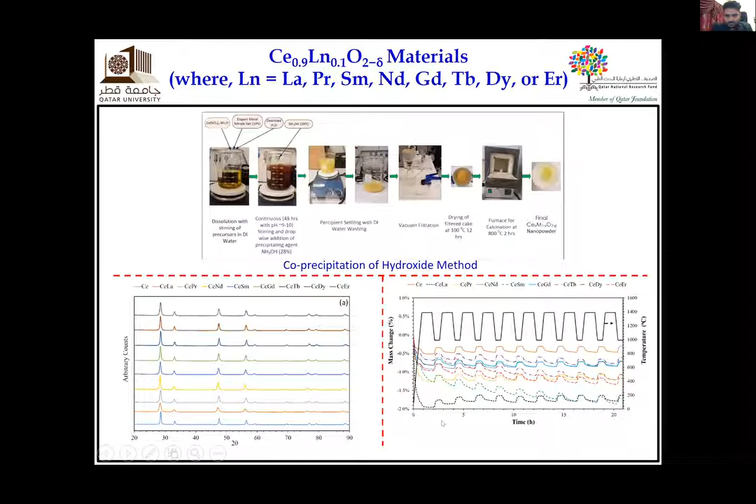Again, these are the TGA plots for each material which we tested. Now here you can see the doping of lanthanide, out of around 10 materials, around 5 materials are better than ceria.

For example, terbium and samarium are producing around 70 micromoles of oxygen, where the ceria was producing 48. But on the other hand, if you see the hydrogen or CO production, only the lanthanum is better, the others are worse. So what does it indicate?

That it indicates that some dopants are better to improve the reduction capacity, but they are not good in terms of the reoxidation. So we are trying to find out the material which can do both. Here in this case, the lanthanum looks better because it is actually helping to improve the oxygen release as well as the hydrogen and CO production.

The third part is about the perovskite, which is recently explored by a lot of people. So we decided to explore that part. We used the solution combustion synthesis approach.

One thing I would like to clarify here is that all these three methods can be applied for all three materials. It's not that perovskite needs solution combustion and ferrite needs sol-gel. We can do all of them, but of course the properties will change.

Now here we did doping of yttrium, dysprosium, terbium, gadolinium, different lanthanide dopants in the structure of the perovskite. Here, these are the XRDs.

We found out based on the SEM that because solution combustion method is usually used for the development of porous materials, so we successfully did that here.

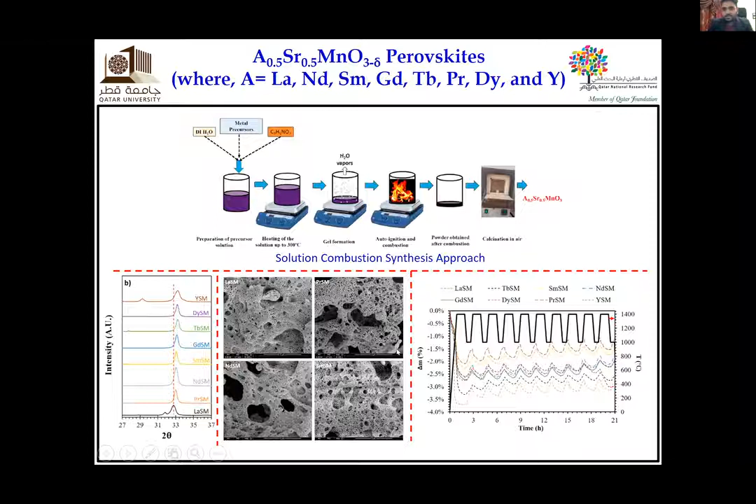These are the TGA plots, and in terms of numbers, you can see the PrSrMnO3 looks better than the others. I mean, if I compare this with ceria, all these materials are better than ceria, and even in case of ferrites.

So if I go back and check, the best ferrite was around 64. If I take the cobalt ferrite, around 70. So basically, almost 7 materials are better than the ferrite.

So that's why people are focusing more towards the perovskite. Also, one thing which we observed in perovskite is that we can achieve a good amount of fuel production at lower temperatures. Okay, this is about the perovskite part.

Then the last part is about the solar experiment. So in addition to the lab scale experiment, we decided to check the actual solar experiment. This was done at University of Florida. They used their high flux solar simulator. This is the reactor setup, and these are the solar concentrators.

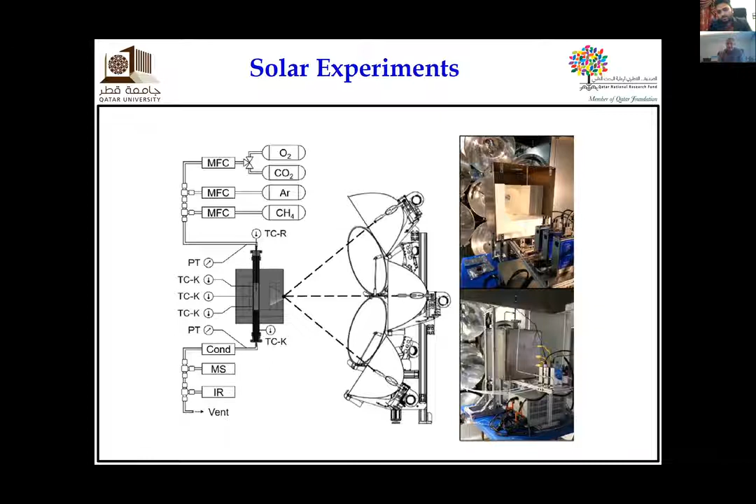Here we use only ceria because we were doing reactor development. So we decided to use the material which is already used by others. These are the summary, for example, how much reduction is done, how much oxidation is done.

The main part which I want to highlight here is the efficiency. So if you check at the end, the efficiency of the process is around 5.88. This is called solar to fuel energy conversion efficiency.

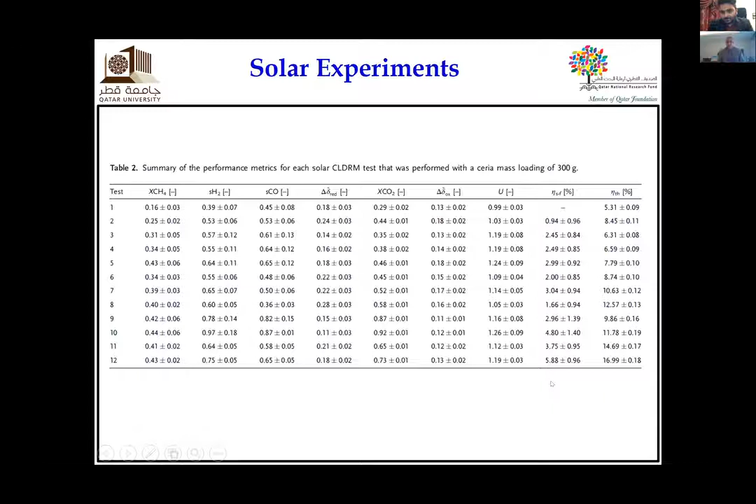So regarding this, the cycling part, basically, we did around three.

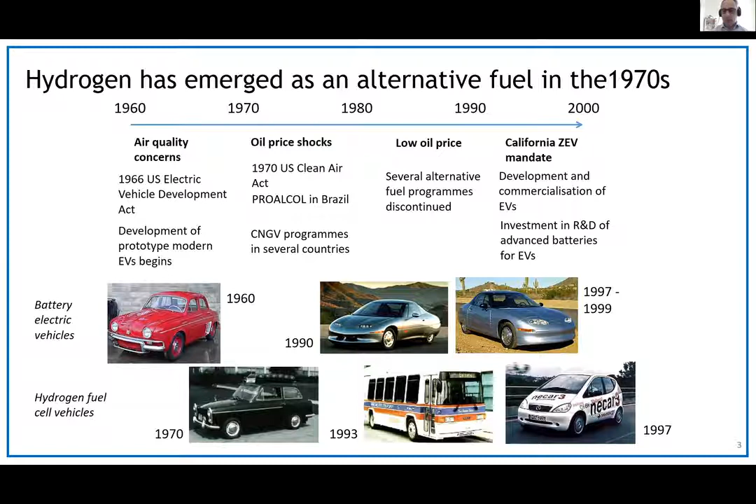It's also worth noting that as a result of the zero emission vehicle mandate in California, around 1995, the California Fuel Cell Partnership began, which brought together oil and gas companies with car manufacturers and government. So that's when you can already see quite strong evidence of collaboration among the different stakeholders to make this a reality.

Now, beyond that, late 90s to today, I think one useful concept to introduce here to explain some of what we've seen is the idea of the hype cycle. A hype cycle is when a technology goes through phases where there are overinflated expectations about what it can do and when it can do it, followed by phases of disillusionment where perhaps the perception of the technology is worse than the technology actually can do. And we have seen a few technologies go through hype cycles, including hydrogen fuel cells.

And then we have seen a lot of effort around hydrogen fuel cells in the first part of the 2000s, where a lot of funding has gone into it, but also lots of work has gone into all sorts of aspects, from planning the infrastructure, building roadmaps, building public-private partnerships, addressing the regulatory barriers, the safety barriers, and so on.

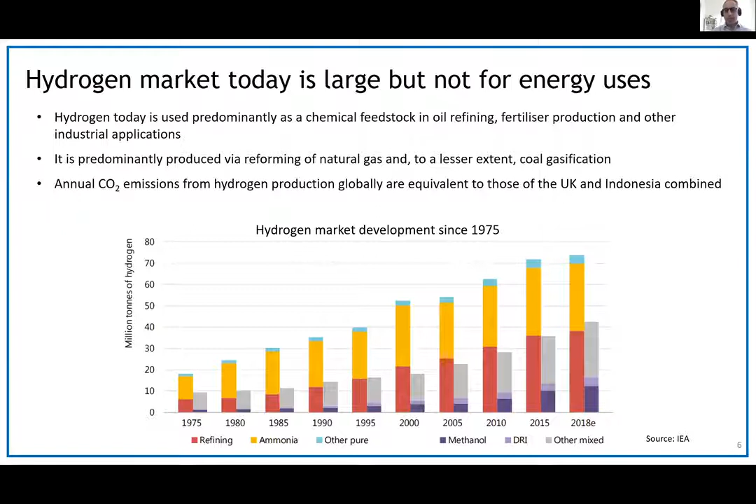So the market today exists, but it's mostly non-energy—oil refinery, ammonia, and other uses—which provides an opportunity because this is quite substantial in terms of emissions. It needs to be decarbonized. The emissions of this sector have been estimated to be as large as the combination of the UK and Indonesia together.

In terms of investment, of course, all this will require large-scale investment. Today there are a lot of announcements about new projects and targets that follow from commitments from governments and industry, and this is quite promising.

But some of the headline numbers we see are about investment that is yet to materialize. Of course, there are some investments happening, which is encouraging, and they are on a scale bigger than before. There are projects in the planning phase, and a number of projects that could or could not materialize, along with the investment to go with it.

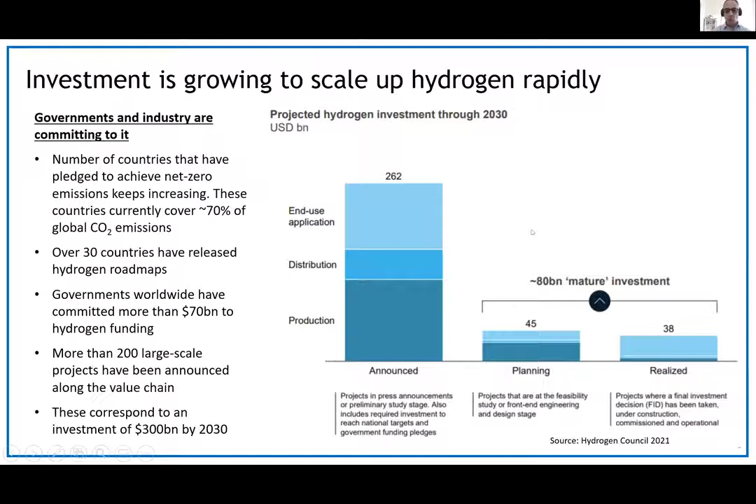The early opportunities lie in industrial areas and ports, where the demand is already there and there's no requirement for major infrastructure. However, we're still looking at projects that are pre-commercial or large-scale demonstration at this stage. We need more policy support to get this to the commercial phase.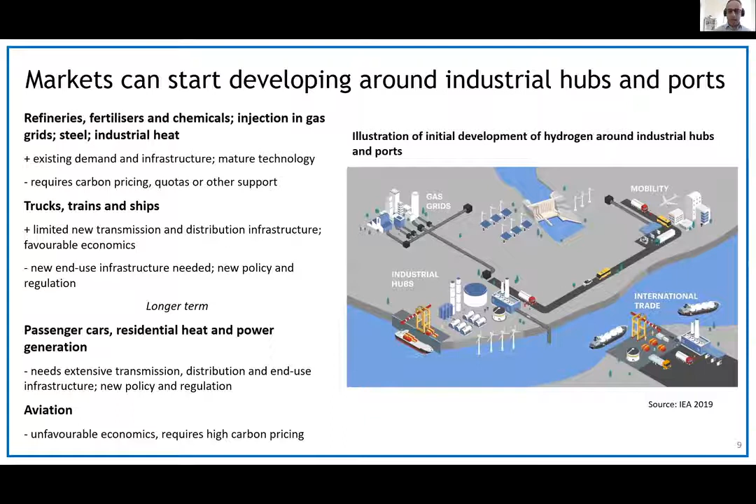Then there is transport, especially trucks, trains and ships, which are also promising in terms of economics. But again, a lot needs to happen in terms of the policy framework and incentives around them for this to become fully commercial. Longer term, we still have passenger cars, heat, and even longer term, perhaps, aviation.

I want to conclude by saying it is probably the case that today we are going through yet another phase of hype. However, we have a lot of work to build on, not just in the technology sphere but also in the policy and regulatory sphere. We understand the challenges a lot more than we used to, we see investment on a bigger scale, and on a political level, hydrogen has gone up the agenda for sure, relative to the past.

There are clear opportunities to scale up the use of hydrogen in ports and in industry, which is different from what we were looking at before in terms of transport, and in a way it's easier. But we're still facing regulatory and policy barriers that need to be removed, plus we need a strong, clear policy framework to really enable the investment from the private sector that is actually needed.

So I will conclude by saying targets might come and go, and the vision that we have today might turn into something different. There is still a lot of uncertainty, but hydrogen over the last decade has certainly been on an upward trajectory. So it is probably more of a case of when than if. I would like to leave it at that.

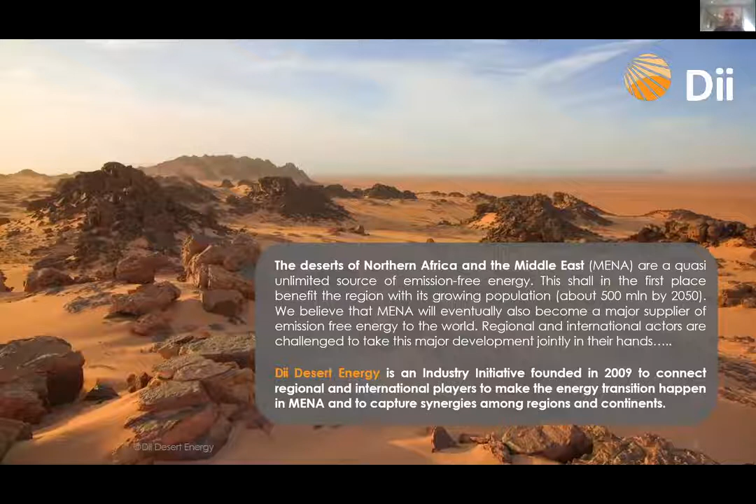And last year, indeed, we jointly set up the MENA Hydrogen Alliance. We are based out of Dubai, a public-private sector network. We are a think tank doing studies, trying really to make an impact to accelerate the energy transition. The group had kind of a revival — Dii went through different phases, from Desertec 1.0 to Desertec 3.0.

So Desertec 3.0 is all about green electrons, green molecules, and making the local region a powerhouse for green electrons and green molecules, local markets, local value creation, stability, prosperity, jobs, and of course the energy transition. That's what it's all about.

Well, recently, as I said, quite a revival. So over the last two years, the network grew again to around 50 companies from 25 countries, and compared to earlier years, Dii is much more international and much more rooted in MENA.

That's some of our cooperation partners. This is the spirit we are working in with our different partners and organizations, and our advisory board as well, which has a few industry captains like CEOs of ACWA Power, Masdar, or Peter Terium from NEOM, or Khalid Al-Zayani from Bahrain, just to name a few.

Now, it is very important, so I come to the green molecule topic, but obviously still today, Dii is really a think tank on the energy transition from a holistic point of view. So it's of course all about renewable generation, which has become a massive success story. It's about grids, integration, it's about storage, and we've worked a lot in this field, and the demand side is extremely important as well.

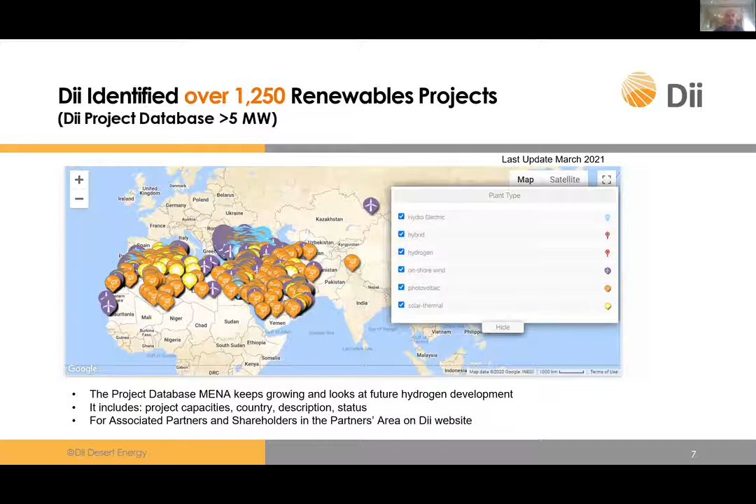Jorgo mentioned the 2 times 40 gigawatt initiative. That has been a great honor to be able to contribute there. Professor Ad van Wijk, my colleague, and Frank were supporting a lot. And we've done other reports.

The latest one actually was just launched very recently, and it will officially come fully out in a few days from now. This was jointly with Roland Berger on the local value creation potential. So we looked at the job aspect, which we've done in 2013 already for solar and wind. And this is kind of a reload.

And this is really the big story for the region. You can debate whether hydrogen can be the new oil, but of course this is a massive story which is here to stay, and it has huge, even geopolitical implications, but it has great opportunities. So whoever is embracing this development will see the opportunities.

And just 2 or 3 slides quickly out of the report, and then I'll come to the projects.

So the GCC region here, this report covers Saudi, UAE, and Oman. Obviously this region has amazing existing infrastructure, an amazing workforce, but also threats from ever fewer jobs in oil and gas, because even the IEA now says we don't need new oil and gas projects from next year.

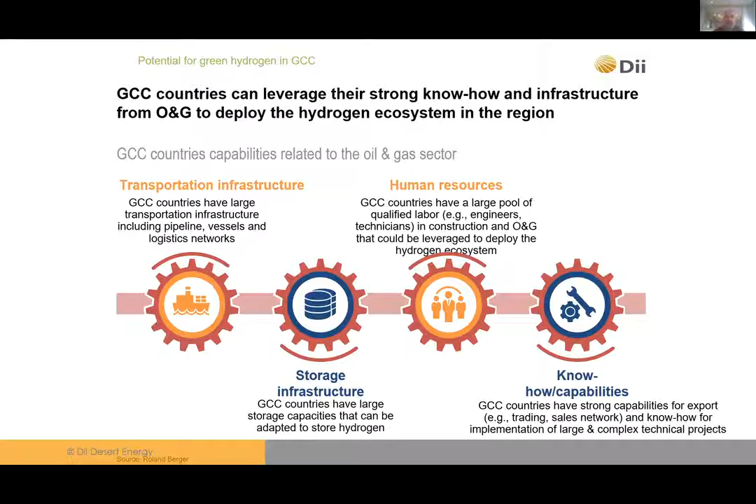So it's clear oil and gas is already in decline, which will accelerate with the energy transition. So this is the big opportunity. We've talked already about markets, but the region is in the center between off-takers like Asia, Japan, and Europe, and Jorgo explained why Europe will be a very important purchaser, with countries like Germany already having initiatives like H2 Global, which has a strategy of sourcing green molecules via contracts for difference.

And here's an important thing in Europe: hydrogen valleys, combining generation, demand, applications, mobility - these kinds of things, effectively called a hydrogen valley, are a very important enabler to create hydrogen economies. Well, you can read it all in the report. It will be available in a few days on the Dii homepage.

Now, as Frank said, and thanks to his initiative, we set up the MENA Hydrogen Alliance last year. You can see on the right-hand side, Frank and myself with the CEO of Masdar when he hosted our first event at WFES last year.

And since then we've really been able to do many things, particularly setting up this new forum, this new platform to discuss, exchange views, and educate government stakeholders, particularly on the technical and economic implications of business cases. Our CTO set up a quite comprehensive levelized cost of hydrogen model.

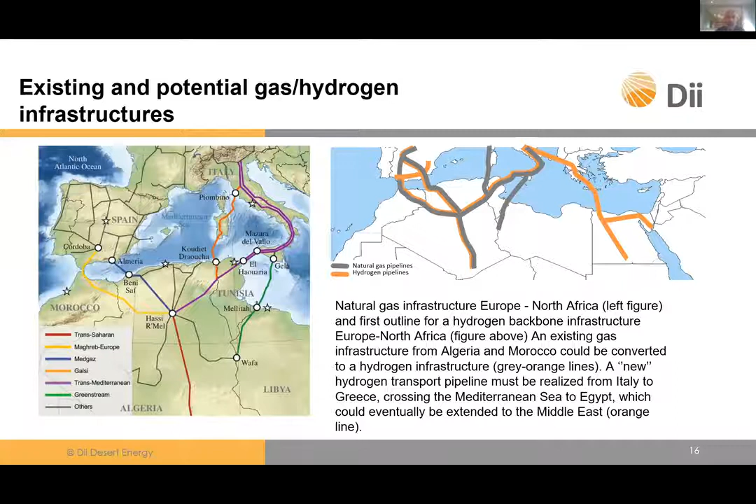Now, very briefly, last week they inaugurated the first green hydrogen project in Dubai, megawatt scale, wonderful - you can check it out on the internet, there are nice videos about it. This is actually an old slide from a few years ago, that was Frank's initiative, talking about potential hydrogen valleys here. So Dubai is leading the pack.

Abu Dhabi has announced an e-fuel project, 20 megawatts, Masdar and Siemens this year. That's the boldest one, it was mentioned before - that's huge. That's a $5 billion project approximately, a 2 gigawatt electrolysis initiative.

This is in Saudi, and it's actually quite close - just opposite Sinai, opposite Egypt. So theoretically, and the Saudi energy minister said we could have a pipeline to bring, in the future, green molecules from Saudi to Europe.

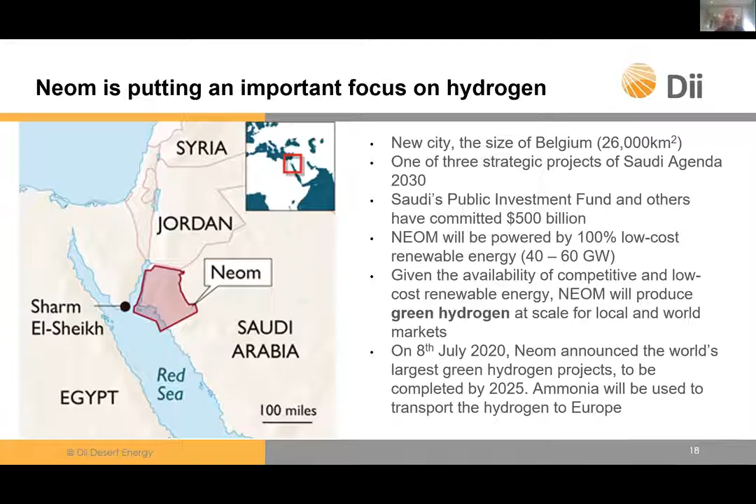Jordan is just starting, but has huge potential and is a leader in renewables. Oman has a big project in Duqm by DEME, of which the first phase is 250 to 500 megawatts. Again, similar to NEOM, a combined capacity factor of solar and wind close to 70%. So this is a very concrete and advanced project, and there were big announcements about multi-gigawatt plans recently in Oman.

Egypt has something as well, but last but not least, Morocco. Morocco has been an early mover, establishing a national hydrogen commission already 3 years ago, and we've been working in partnership, as we've been doing over the last 12 years on green electrons, also on green molecules. It's great to see that the first project is actually financed and supported by the German government.

So this is just briefly the development here - it's a massive shift. Two years ago, nobody took hydrogen seriously. One year ago, nobody would have expected that on the same day as the European hydrogen strategy, NEOM would announce such a project. This year saw an acceleration of projects. So we are living in a completely new world - it could not be more fascinating. And I'm 100% sure that looking back on this decade, we will see that this has been breathtaking, and all predictions will be proven wrong in a positive way for the energy transition, which is currently massively boosted by green molecules.

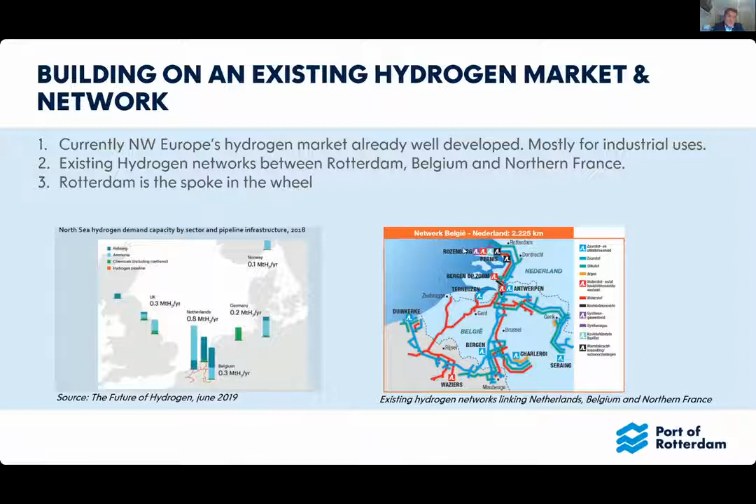So one of the main advantages in Rotterdam really is that we're not starting from scratch - we already have an industry that's very easy to expand. And we're not only talking about the Netherlands; clearly the Netherlands and Germany are leaders in the energy transition in Europe. Our national gas transport company is looking at converting part of our national gas grid into a hydrogen grid, so we're going to have a double pipeline around the country distributing hydrogen within probably 4 to 5 years from now. So really moving forward very fast, and also connecting to the German potential future hydrogen grid, which they are also developing - particularly the connection from Rotterdam to the German industry of North Rhine-Westphalia is one that's very strong already, and that of course will be expanded with hydrogen connections in the future.

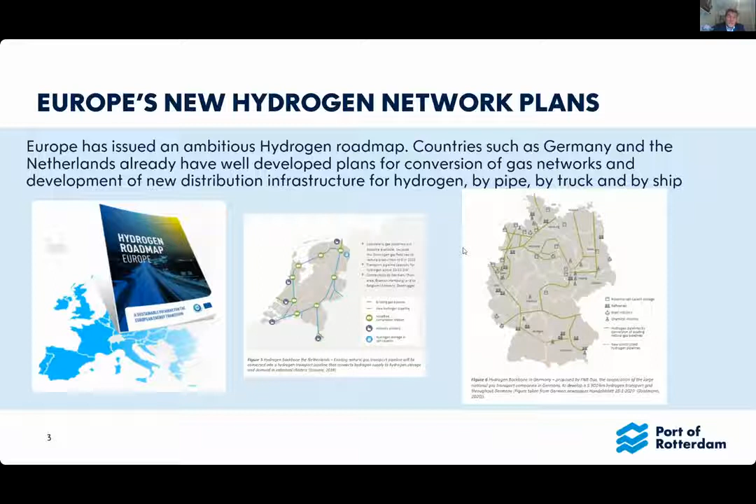So how is hydrogen then fed into that system? We have 3 different sources. First of all, as mentioned, we're going to produce locally produced green hydrogen from the offshore windmills. We already have the first Shell and BP electrolyzer plants of 250 megawatts each planned at the western end of the port. But we see a limitation in the longer run of the amount of green power we can produce, and hence the green hydrogen as well.

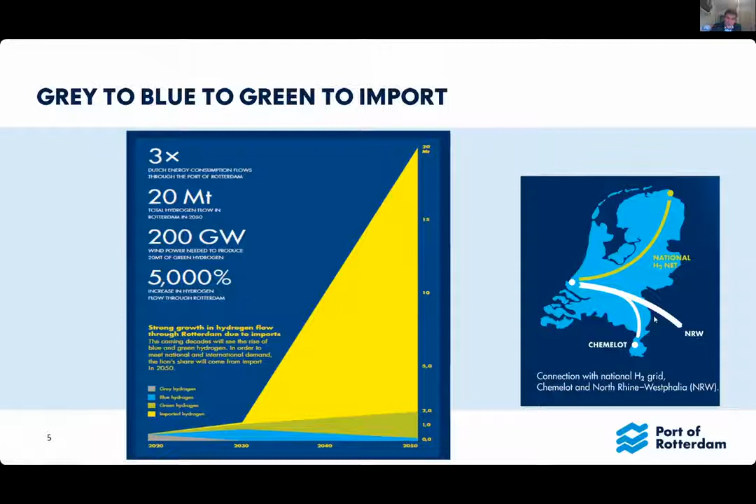So it's with that ambition and those plans that we believe that, through our very efficient terminals and efficient logistics and onward connections, we could become the hydrogen hub of Europe, as we are currently the fossil energy hub of Europe. We very strongly believe that we will become the hydrogen hub of Europe, and we welcome and anticipate hydrogen from all over the world to be distributed to locations all over Europe.

Coming to a close, my job was to anticipate where the hydrogen would be coming from. We did a desktop study, as DII also probably did, among many other parties, and our conclusion is that there are at least 15 very high potential locations the hydrogen can come from. Clearly the Middle East is also extremely viable. There will be roughly around 3 demand centers that will compete with each other, but I think at the moment the European ambition is probably one of the strongest.

So what are we keen to do? Clearly, we're developing all the logistics to provide the demand at our end. The port is already converting, the terminals are converting, pipelines are being laid. But we're also keen to understand more details of the projects where the hydrogen could come from, the export projects, maybe your projects in Qatar or other countries in the Middle East.

And we'd like to work with you, we'd like to assist you. We're very free in sharing knowledge and making connections and seeing if we can accelerate these new supply chains, and maybe help you with your port industrial complex developments on the outside. And here's a nice example.

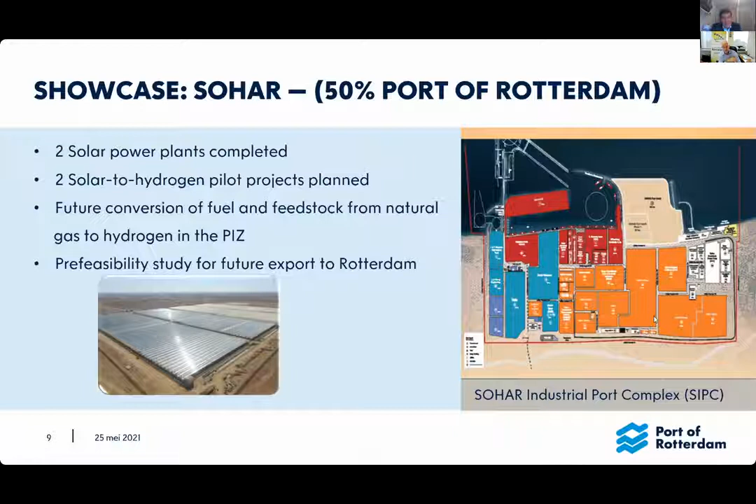We are already, for instance, a 50% shareholder in the port of Sohar in Oman, who are very ambitiously currently converting their industry into more green and electrified industries, and we're helping them with that. It's in that similar way we could help other ports in the region as well. That's the way we believe we would like to work together in a partnership on something that's new business, but most importantly, is important to keep the world a good place to live in for our children in the future.

Thank you very much for that presentation, Martijn. Let me stay with you, because in view of the time, we'd like to limit it to perhaps one question each. Martijn, your plans are quite ambitious, and being a Dutch port, there's a lot of Dutch connection. How much government involvement do you need for these things to materialize, and what is the interaction between the public and the private sector?

That's a good question, Frank. Clearly, these are such large projects that they cannot be done by private sector or public sector alone. So there's a huge interface on various facets: subsidies, certification, logistical connections, et cetera. We're in continuous talks with the various ministries in the Netherlands, but also in Germany, particularly the state of North Rhine-Westphalia. A large pipeline to Germany is not something the Port of Rotterdam could finance themselves immediately, so that's a scheme where probably subsidies will need to be involved. On the terminal side, though, we're seeing very ambitious activities from the various terminal operators in the port. Everybody's super keen to get involved and ready for this new energy transition. On the private sector side, we're seeing a lot of willingness and potential funds getting ready to make this all happen.